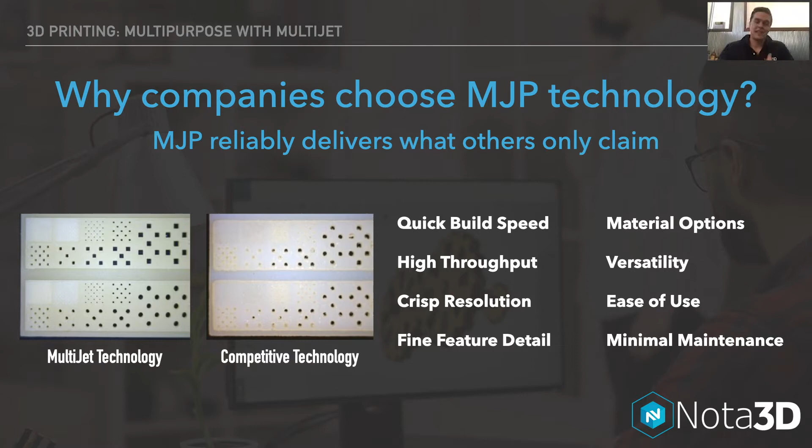Quick note, the 3D printing world loves acronyms, so we are going to refer to MultiJet Printing as MJP. You'll hear us using MJP a lot. So why do companies like to use MJP? Mainly because of the wide range of benefits that it provides. If you were to ask our customers, the most common that we hear back are the ones you see on the screen: extremely high resolution and detail, crisp corners and edges. A really big one is the no maintenance print heads, easy material changeovers that don't require excessive purges and wasted material, and not to mention the wide range of materials available.

So, based on having such a broad range of capabilities, MJP is usually a pretty good fit for a broad range of industries. And here to help me talk through some of the various industries that we've helped over the years is Tom Rohrbeck with our company. He's a longtime veteran with the additive manufacturing industry. He actually started his career with 3D Systems back in 1986. And over the years, we've worked with pretty much any industry that you can think of, but here's a few key ones that we're going to dive into today.

So, Tom, you with us? Sure, sure. All right, cool.

Yeah, one of our more popular market segments that we see is medical. The medical industry really demands high precision parts. Based on the high precision of the MJP systems, that's why they are bringing in the MJP. Yeah, exactly. So I think healthcare is probably one of the largest industries where we see MJP as a fit.

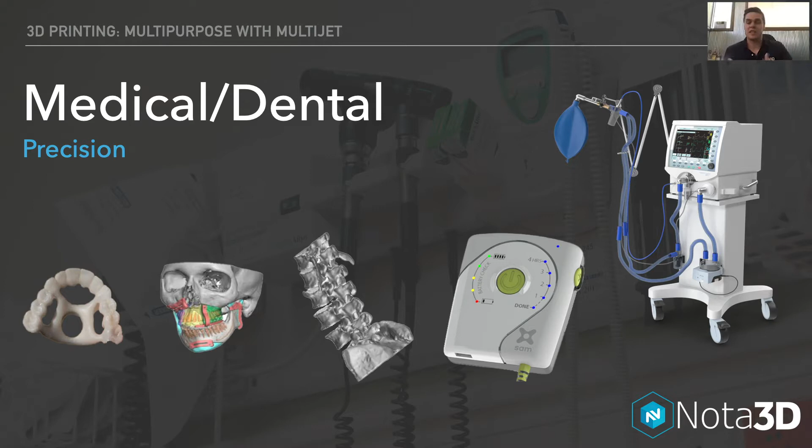So from medical device companies printing device prototypes to dental labs printing orthodontic models and hospitals printing pre-surgical planning models, and then universities printing medical educational models. And so that's an application we're going to talk about a little bit more today. But another big thing is MJP offers a really wide range of biocompatible and Class 6 certified materials. So those medical grade materials paired with high accuracy make it a great fit for the medical industry.

We have a number of customers that fall within the electrical market. And what we find with our electrical customers is that they really require high resolution, high detail on their parts. Yep, exactly. And so obviously having that type of resolution and detail makes MJP another great fit for that. But also we have some new materials that have come out, including a new high temp material. So what that's actually allowed is some of our customers to wave solder printed components, and that's at 280 degrees C. So that's also become a huge factor in companies using MJP for electronic prototypes.

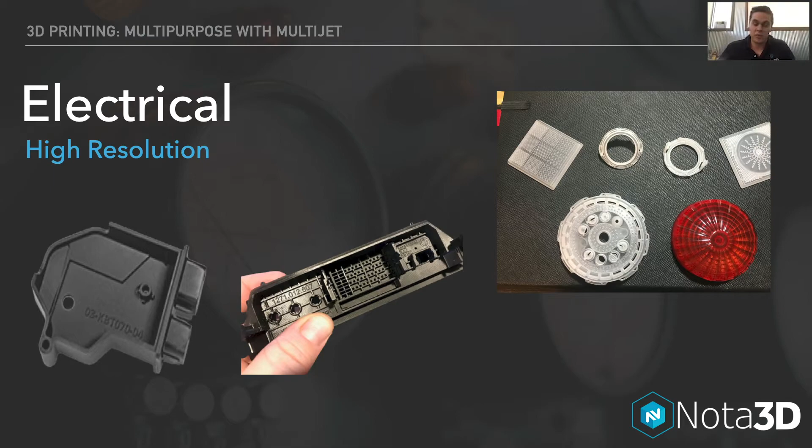Architecture is a very interesting market segment. We have a number of customers that used other processes in the past, but based on the easy post-processing with wax on the MJP, many of our customers in the architectural market are using that system. Yep. And another thing to add with architecture. If you see the parts on the left side of the screen, you can't really tell very well, but we actually had a customer that had purchased a 2500, and she was printing a really large model of kind of like a skyscraper, and she had to print all these little conference tables that had to go into the model.

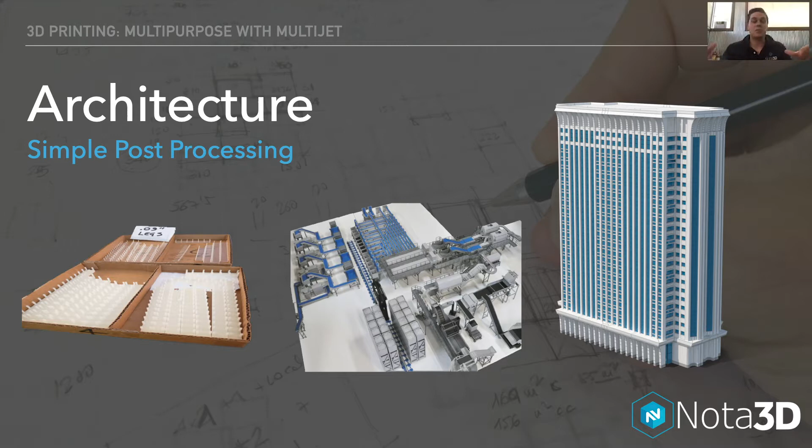And so obviously the resolution made it so we could print these fine little legs, but also post-processing. We had to print 105 of these. And post-processing that could be a total nightmare, but we actually were able to print all 105 in one build. We were able to nest it up. And since we used the support wax, which we'll dive into a little further in a couple minutes, we were able to batch build, and then take basically this entire block of parts and post-process them all at once. So it made it very easy, very simple, and there was no damage to the parts, which is something very common with other technologies. So that's been a huge factor for architecture, but we see that in a lot of other industries as well, being able to print big batches and post-process in big batches.

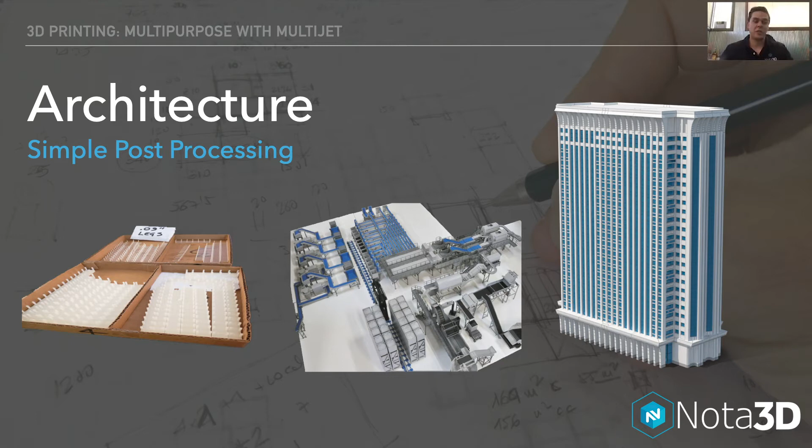Consumer products is another really big market for the MJP product. And these customers typically do lots of different geometries at all times. So throughput, speed, and versatility, whether it's different material options and whatnot, become a big part of their requirements. Yep, exactly. And since most customers have a wide range of products and projects, one or two materials isn't going to fit every project. So especially in consumer products, these companies need a machine that can be flexible to their needs and offer different materials that can meet their ever-changing project demands.

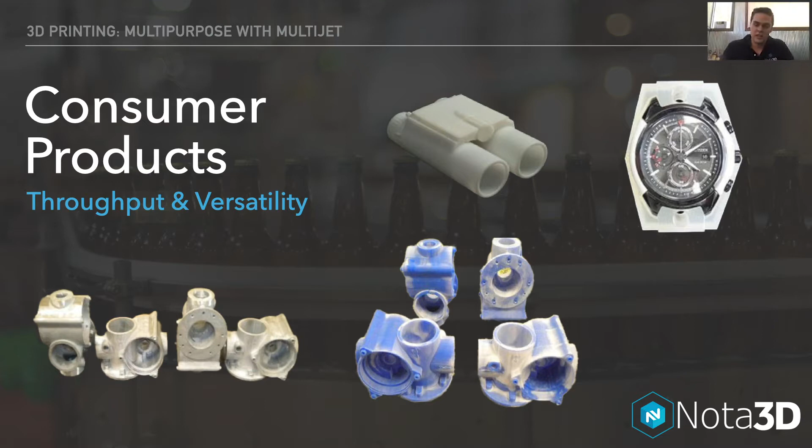So what exactly is MJP? So how does it work? Some of you may have seen this before in the past, but MJP works similar to an inkjet printer that you probably have sitting at your office or your desk. We load in cartridges of material, a liquid material that gets fed to a print head. The print head shuffles back and forth over the build tray. It jets out a model material and it jets out a support material. We use a wax support material that allows for easy melt-away post-processing and batch post-processing that I was mentioning.

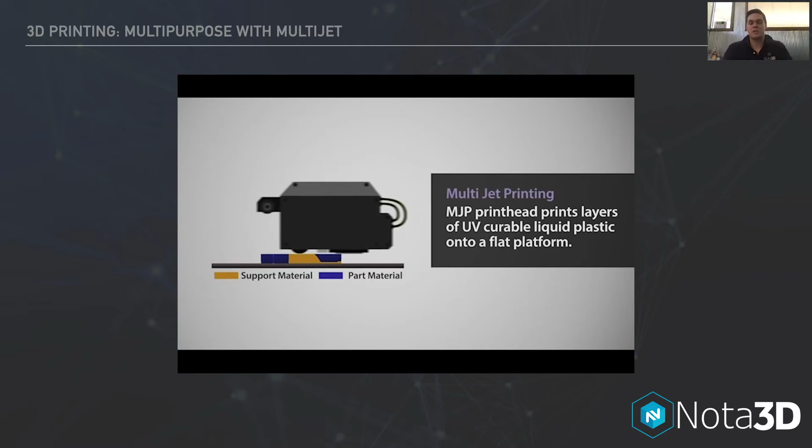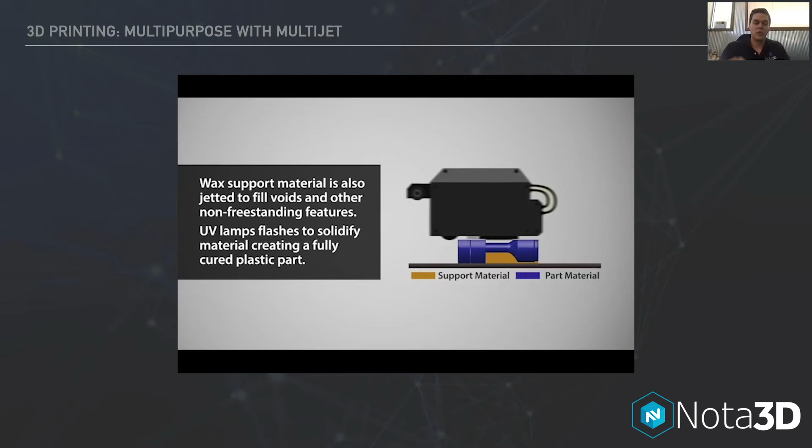But we also use what's called phase change chemistry in our materials. So we slightly heat up our material in the machine, and then when we jet it, it's partially cooling and solidifying on the way down. So we can really, really control our droplets much better than the competition. That's how we can offer such high resolution and really, really crisp detail.

We kind of touched on this a little bit earlier, but since it's unlikely that all of your projects have the same needs and requirements, it's really important to find a machine that's going to offer material flexibility and a wide range of options. So we have our engineering grade materials for projects that require functional testing of high accuracy parts. Then we offer high temp materials for obviously high temp applications or even rapid tooling. Then we have our standard rigid and elastomeric materials for concept and aesthetic prototypes. And we actually even have a version of the 2500 that prints in a true foundry wax for investment casting.

On our 5600, which is the large version of our MJP technology, that machine actually allows you to blend multiple materials at once. So that gives you the ability to create custom blends and specific durometers, so you can tailor the parts to your project needs. And one thing I wanted to add in here is one thing that 3D Systems does really, really well is they put a lot of time and money and effort into developing materials and capabilities for the existing machines, right?

So our flagship machine, the ProJet MJP 2500 Plus, has been out for about 5 years, and we've added 7 materials just in the past 3 years to that machine. And if you own that technology, we just let you run it, right? So we just tell you, hey, here's an update, and now you get to run this material. So we don't charge you for a material package, or we don't just say, hey, I know you bought that machine 6 months ago, but if you want to run this material, you've got to buy the new one. So it should give customers a lot of confidence in making a purchase in this type of technology, that it's not going to become obsolete anytime soon.

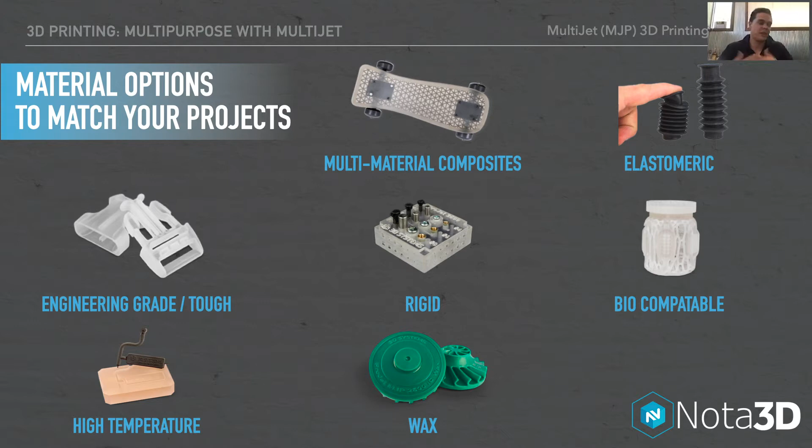So this is the MJP line of equipment. Between any of these machines, we're really going to have something that's going to meet your size and material requirements.

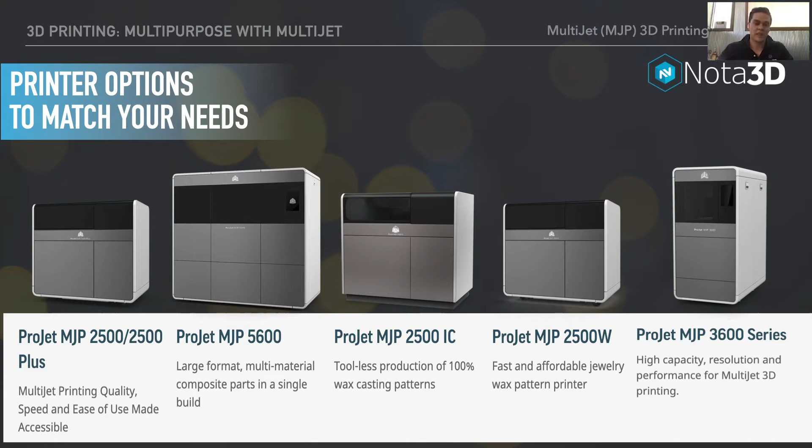3D Sprint is the software that comes with all of the 3D Systems machines, and we use it across all of our technologies. So 3D Sprint is super easy to use and offers a ton of user control over their files, which is great. There's a lot of different capabilities within 3D Sprint, but for today, Joe's just going to dive into a couple for you.

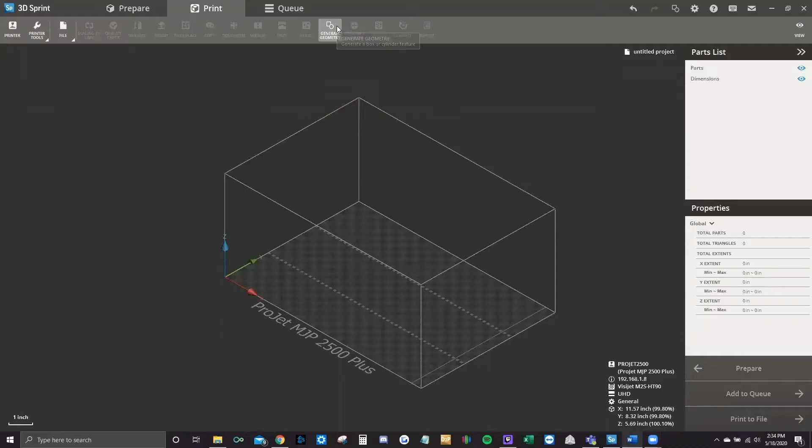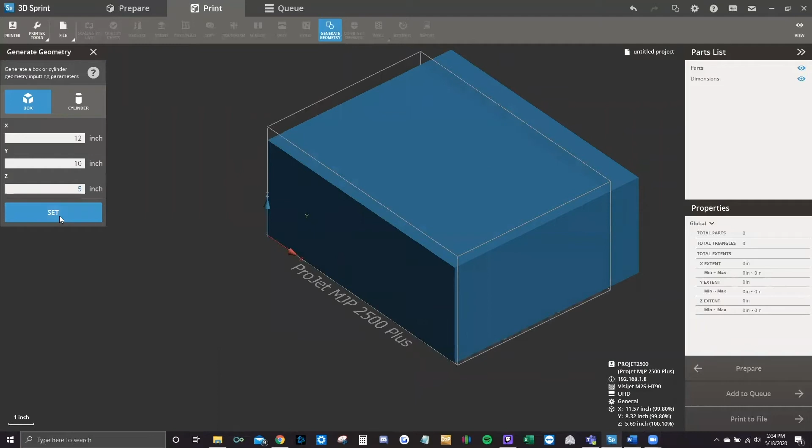My name is Joe Corbell with Nota3D. I'm the applications engineer. I'll be going over today the split function in 3D Sprint. So to get started with that, we're just going to take a general geometry that we can create right in Sprint itself. Let's say we pull in a part that's a little bit too large for the build plate. Call it 12 by 10 by 5. So that'll generate this large cube that we can see is clearly outside of our build platform, but that's what we want. So the software will automatically kick it off to the side, just because it can't print a part that big.

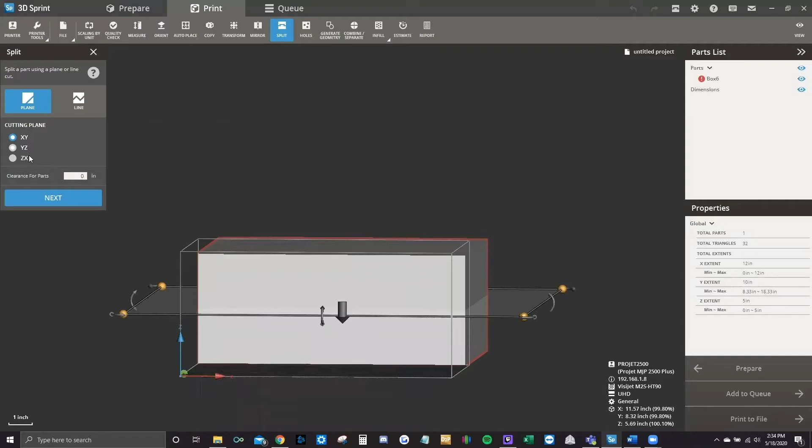So like I said, we're going to go into the split function that's at the top right here in the toolbar. Go ahead and click on that, and it gives us the option to cut on a plane or cut on a line. Obviously, we're not too tall for the build platform, but we are too wide. So we'll take the Y and Z split.

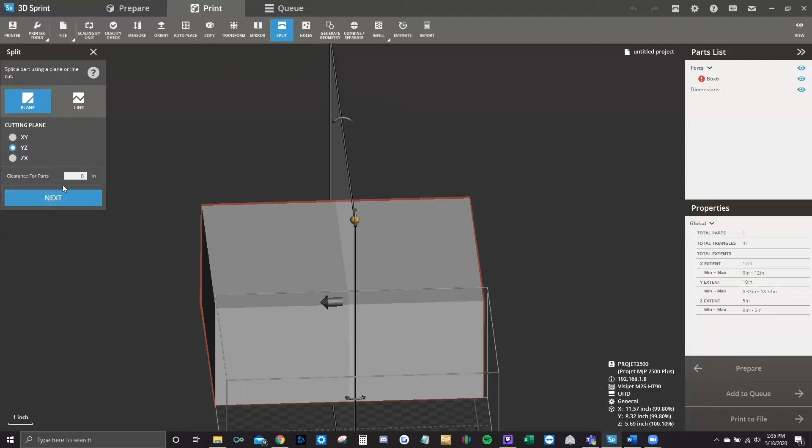We don't really need a clearance for these parts. The clearance would be if we had some sort of bonding agent where it would need to fill in a gap. So since we're not going to be using that, or the super glue that we would use is thin enough, we're going to keep the 0-inch tolerance clearance. So we'll click next. You can see that there's actually connector pins that are automatically generated. You can choose to turn those off, but for the sake of demonstration, we'll keep them on. It'll help line everything up as if we were actually making this part.

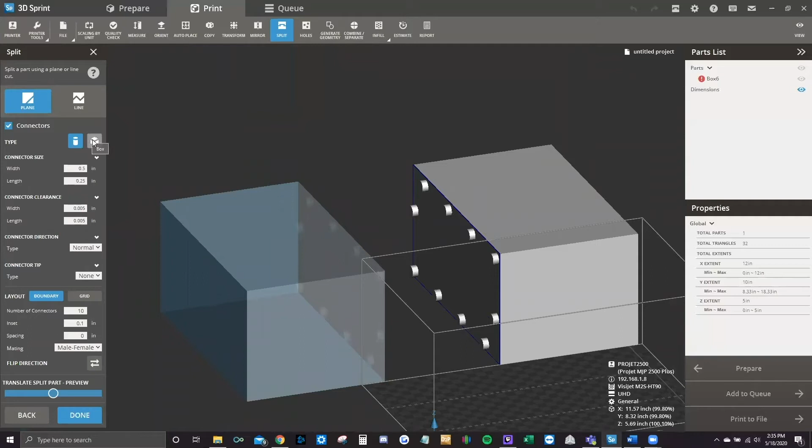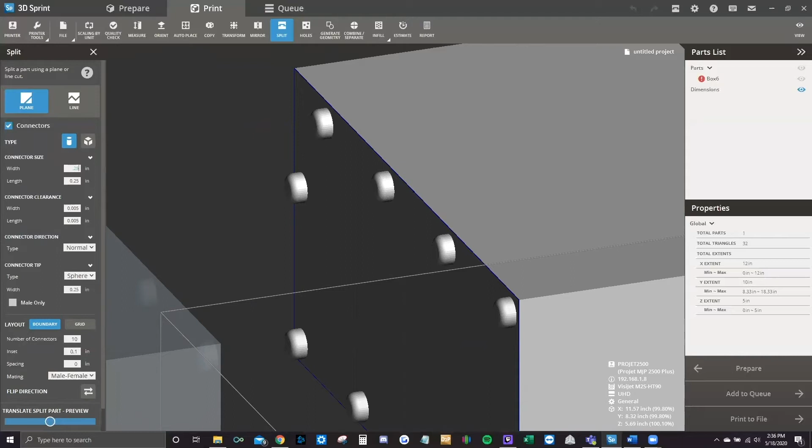So we can dictate whether it's going to be a box connector or a cylinder connector. We can dictate whether it's going to be a sphere, so rounded off, or a chamfer. And the smaller these pins get, the chamfer will go away, but the sphere function will still work. So we can say we want to do 250 thousandths by 250 thousandths. That will give us our connectors there. We can choose to do the male only for the rounded off, to give the female connectors a bottom out.

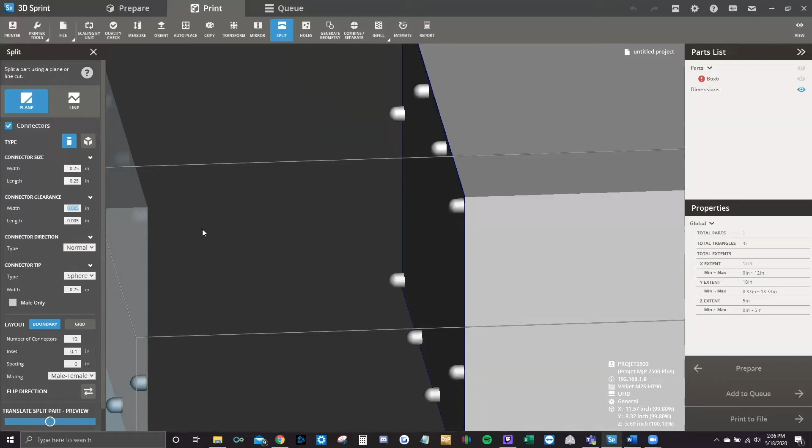Can choose the tolerance. Again, this will only be if you're using a bonding agent that will require more space than you would actually need in the part itself. So we'll leave that at 5 thousandths as a good guess. That'll give us just enough wiggle room to line everything up correctly as we need to mate it. Instead of letting the software dictate where all of the connectors will be, we can do a grid pattern.

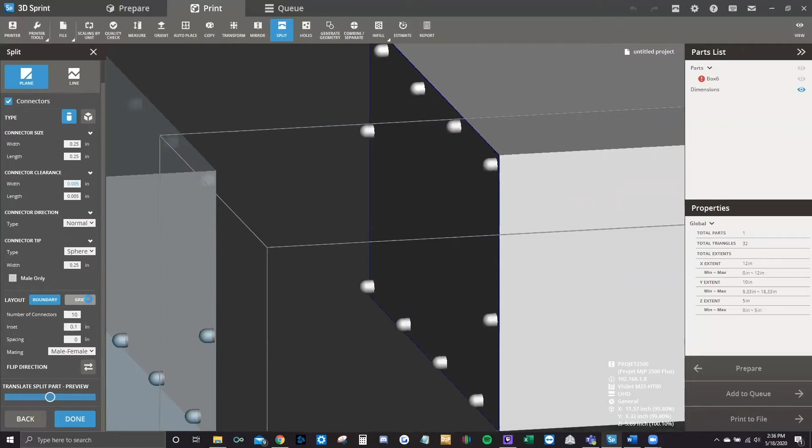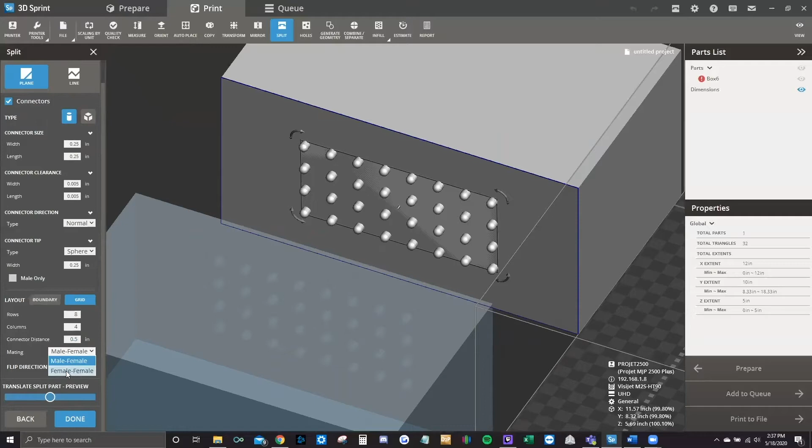We can say we want 8 rows of 4. We can space these out differently, turn the grid and everything like that. And you can line this up any which way you would want. You can do female to female connectors in case you had dowel pins or something that you wanted to connect in. So you don't need to use the connectors that come with the software. It's just automatically generated, so they make it nice and easy.

So we'll go ahead and turn that. We'll say done. And it gave us our 2 halves. So what we want to do in this case is save off 1 half because we're only going to be printing one at a time. So we'll go File, Export. And we're exporting the box split number 2.

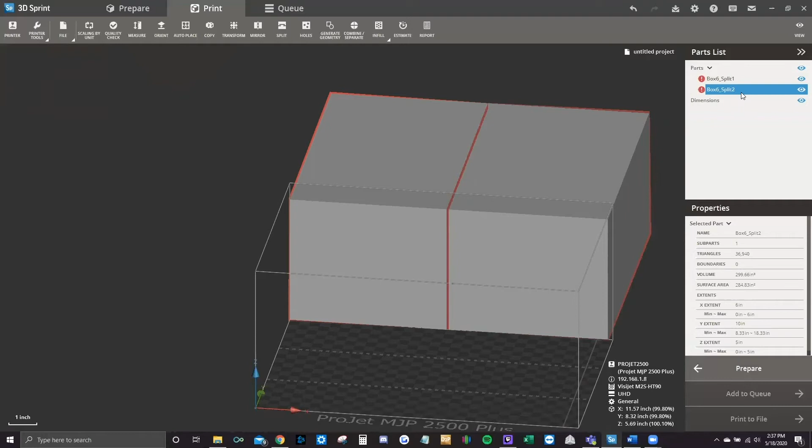You can export as STL, CTL, OBJ, WRL, PLY, and AMF files. STL is going to be the easiest to work with, so I'll just export that out. Save that. Click out of that. And then we can go ahead and delete this out. So from here, we'll just use our auto place feature, let the software kind of decide how to turn this so it'll fit on the build platform. And there we have it.

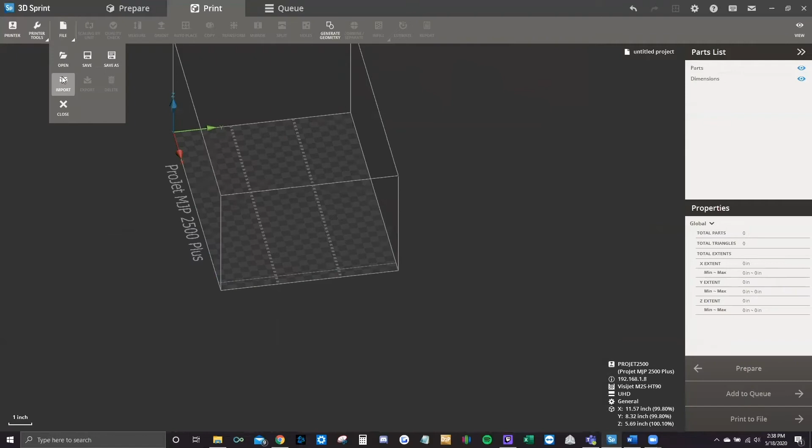So we would add this to our printer queue, and then we would load in the other part. So we'll delete this one out as if we added it to the queue. File, Import, and we'll take our box 6 split 2. We have the same connector pins, auto place again. And we would print this as well.

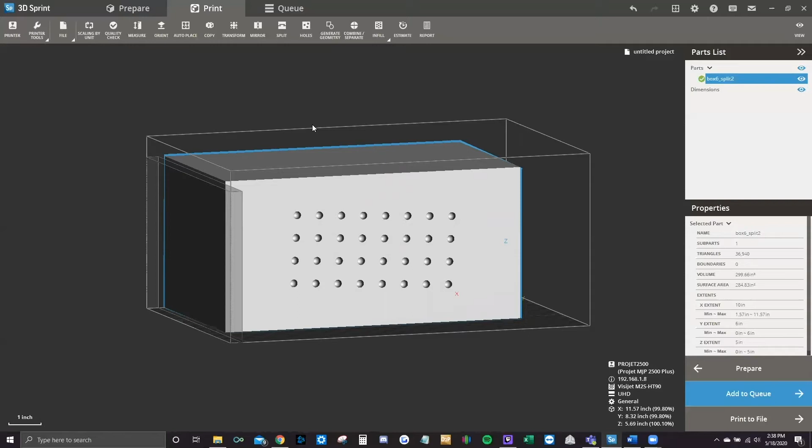So once this is finished, you would simply mate the parts together, super glue, or use a UV curing adhesive. Really any number of ways you want to bond it. It's pretty simple to do. But going from there, I'll generate another box. Say we have another part that's far too large.

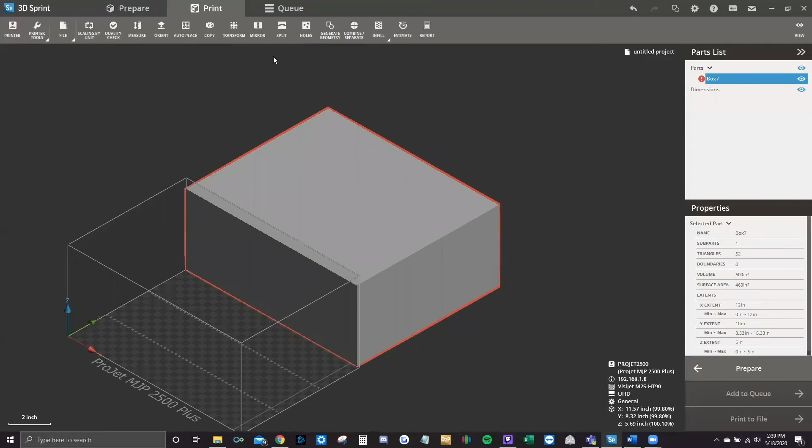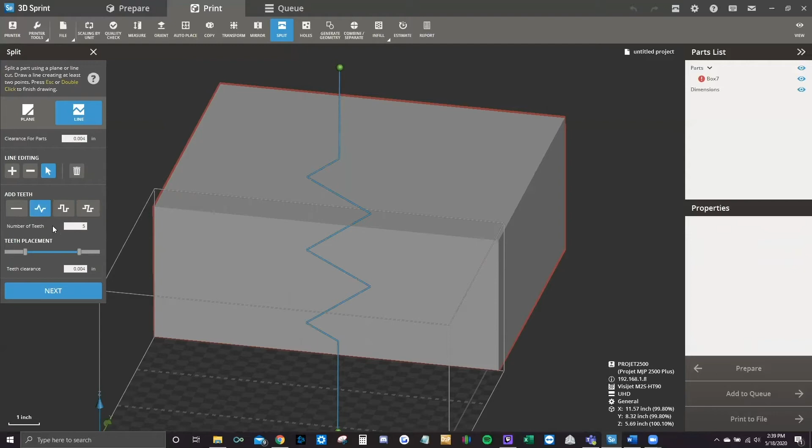We'll say set. The other side of the split function is the line tool. So anywhere that you take a perspective view from your part, it's essentially going to slice it right down the center of that. So since we're not directly straight on, we can't turn our camera. It's going to slice it directly through this part. We can kind of choose whatever kind of style of teeth automatically we would want instead of having to draw these out by hand.

So the dovetail, we could add more or less teeth. They'll get smaller or larger depending on how many more you take. You can kind of adjust the line from here as well. You change the back end of it, make them wider. You can also add a clearance for these parts.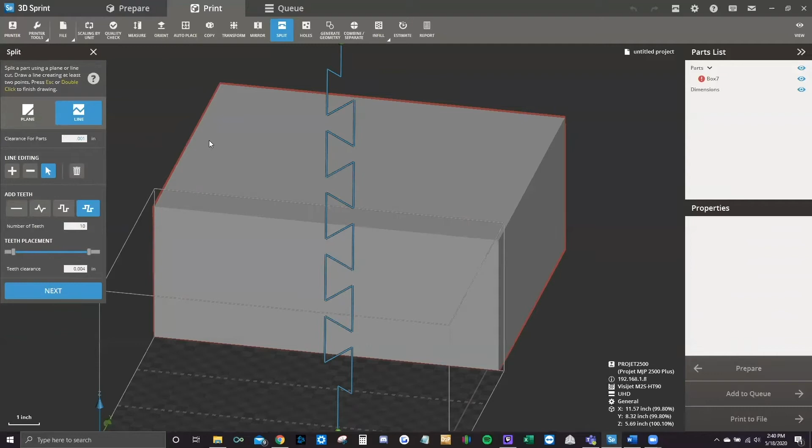Again, since we're not going to be using any bonding agent, we don't really need a clearance. It might make it a little bit easier to mate together if we have a 4/1000th clearance there. So we'll go ahead and do that. Click Next, and it slices straight down the center of the part from where we had our viewpoint. So we'll say Done. Again, we'll highlight our part, export it as an STL.

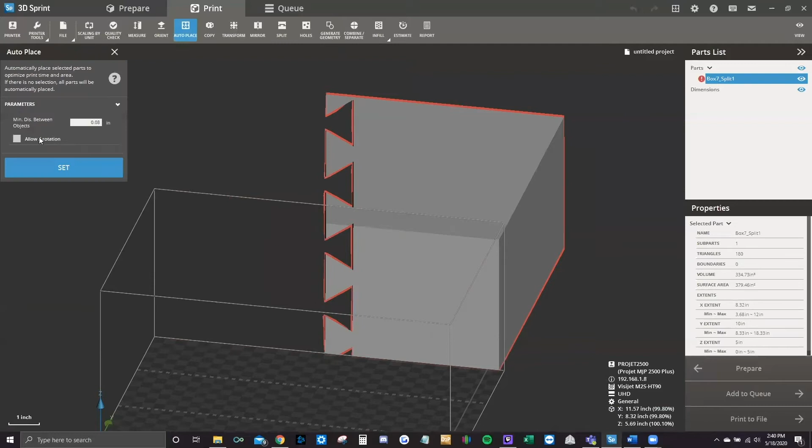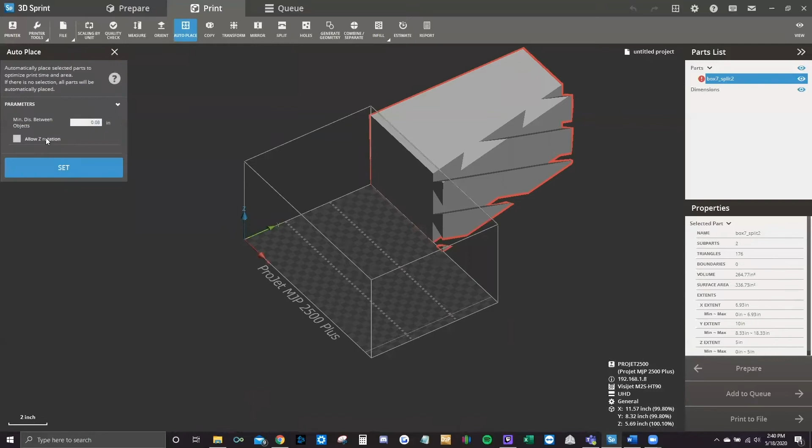And we'll delete that portion. Now we can see if this will fit by hitting auto place. It's outlined in blue. Everything fits just perfectly. And we would add this to our queue. And again, we would delete that out. Reload the split that we deleted earlier. Auto place and auto rotate. And we would add this to the queue as well.

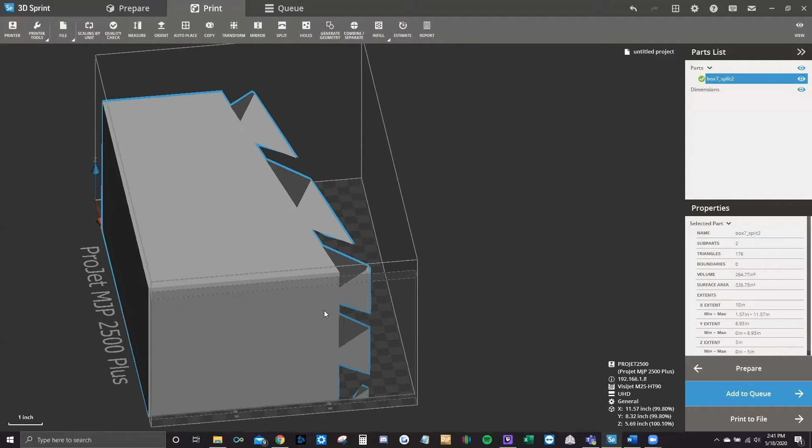So you can see down here, there is a little bit of a cutoff there, but if we're really careful and we take a different viewpoint, it's pretty easy to avoid that. So we would just add this to our queue. We would print both the parts, slide them together and lock them in place using the adhesive that we would need, and we would have our fully combined part. That covers the split function.

If there's any other questions or concerns, you can always go to the 3D Sprint help. You can type in split, and it'll help kind of walk you through everything on this page.